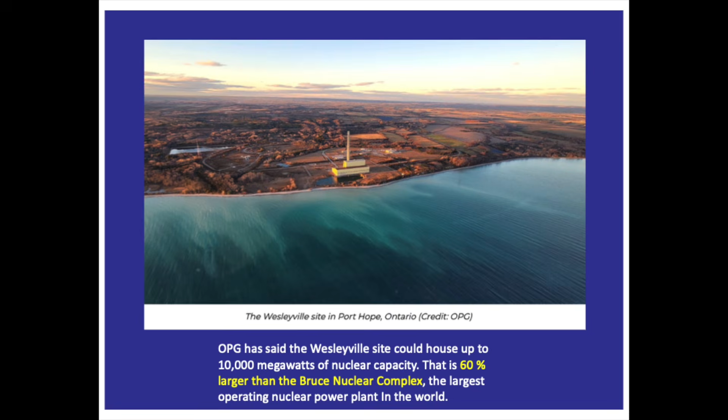What it's going to mean for the county in terms of traffic, in terms of noise, in terms of pollution, in terms of demand for services, and so on and so on. It really is a truly life-changing experience, and it depends upon what your priorities are. I'm sure that when a project like this comes in, there are people who can make a lot of money out of it. Other people can suffer the consequences. The question is, what are your values and how much are you prepared to stick up for them?

And they also have a requirement at Bruce for top security. And so they have a SWAT team, which has won U.S. national SWAT team competitions more than once because they're so tough. And they're allowed to use prohibited weapons, that is fully automatic machine gun type rifles that are forbidden to be used by the police or even by the RCMP. And that's because they are entitled to protect the plant with whatever force they deem necessary.

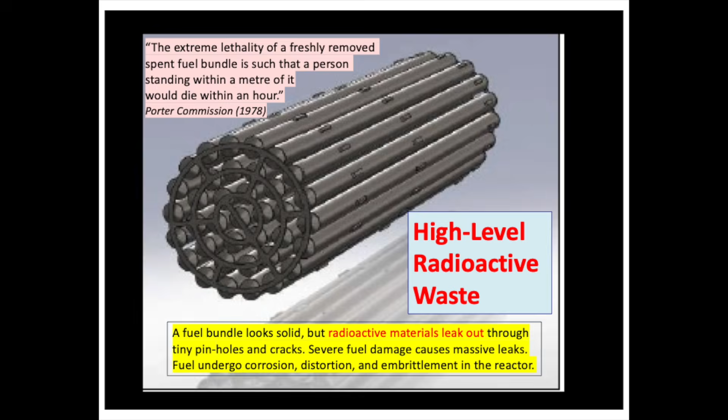You may not realize it, but that waste is going to be accumulating right here in your neighborhood because they're not going to take it anywhere soon. In fact, they have to store it for 10 years in a pool of circulating water. And all the time it's in that pool, the radioactivity is slowly dying down, but it's still extremely lethal for hundreds of years, even to approach.

The reason they have to have that pool of water there is because these wastes are so radioactive. They're millions of times more radioactive than uranium. You have here a uranium plant. These wastes are millions of times more radioactive than uranium. And the reason why is because the uranium atoms have been split. And when the uranium atoms are split, you create a whole multitude, hundreds of broken fragments, which are new atoms, smaller atoms, which are very unstable and consequently very radioactive.

And the radioactivity alone generates heat. And if you don't have water cooling the fuel, it's going to overheat spontaneously. And possibly when it's fresh fuel, freshly out of the reactor, it can even melt under its own heat. In fact, that's what causes meltdowns.

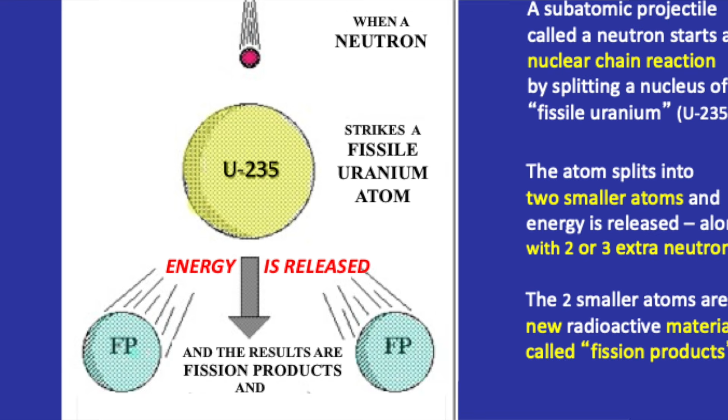Many people don't know that the Fukushima reactors that melted down in Japan, 3 of them, they didn't melt down because of the reactors operating. The reactors were shut down within minutes after the earthquake. But a day or so later, the fuel melted down because of its own generated heat from the radioactivity. It's the radioactivity itself that caused the meltdown. And that's what we're dealing with here.

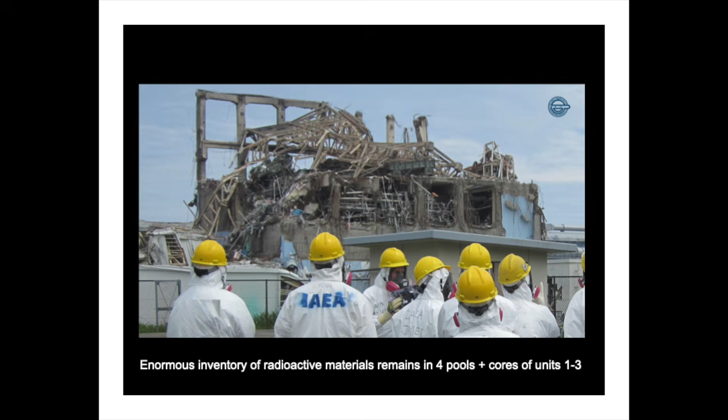Those radioactive wastes cannot be moved for 30 years after they come out of the reactor. Consequently, they're going to be accumulating here in Northumberland County, right on the shore of Lake Ontario. And there's going to be 30 years worth for every reactor that is operating. This is what happens when you take it out of the pool. You have to put it into what's called a dry storage container.

This particular one contains something like 384 fuel bundles. But the fuel bundles themselves inside weigh 10 tons, whereas the cask that contains them weighs 60 tons. So imagine a refrigerator, and imagine a case to ship the refrigerator where the case is 6 times heavier than the refrigerator. That's what these dry storage casks are like.

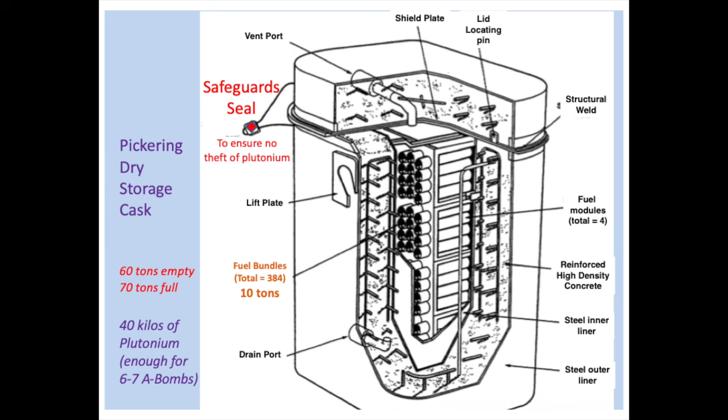And that's because they realize that these wastes are so incredibly dangerous that they have to protect workers and the public from inadvertent exposure to the wastes. When they do have a nuclear accident such as a meltdown, what it is is an accident that allows this stuff that is already there to be released. It's sitting there waiting to be released.

If it were attacked by a military operation, a bomb, for example, or if there was a severe earthquake, or as at Fukushima, where you had a tsunami followed by a complete loss of power to the plant, that's when these things go wrong, and that's when everything can be spewing out of the reactor and causing widespread contamination for a very long time. So that's what we call a nuclear accident.

And of course, they do everything in their power to prevent such an accident from happening. But the question is, how much is really in their power? We find out oftentimes that what they thought was in their power was not in their power at all. So nuclear waste has nowhere to go. Most of it will stay at Wesleyville for more than 100 years if this plant goes ahead.

And the reason for that is because they're hoping that these reactors would last for maybe 60 years before they were shut down. Now, that's never happened before. Reactors don't last that long, that's dreaming in Technicolor, right? But if they last for 60 years and then you still can't move the spent fuel until it's cooled off for another 30 years, you're already almost 100 years.

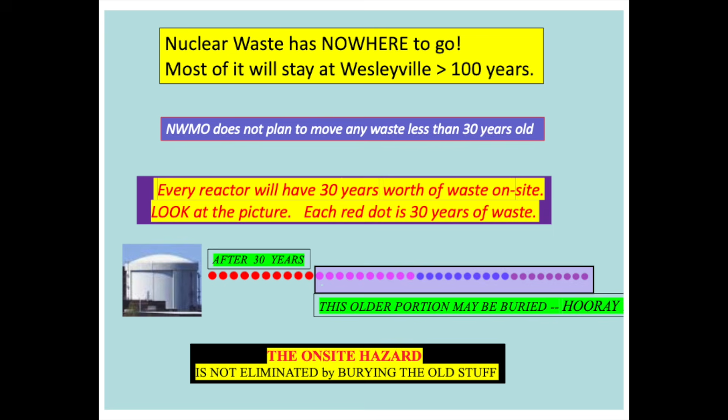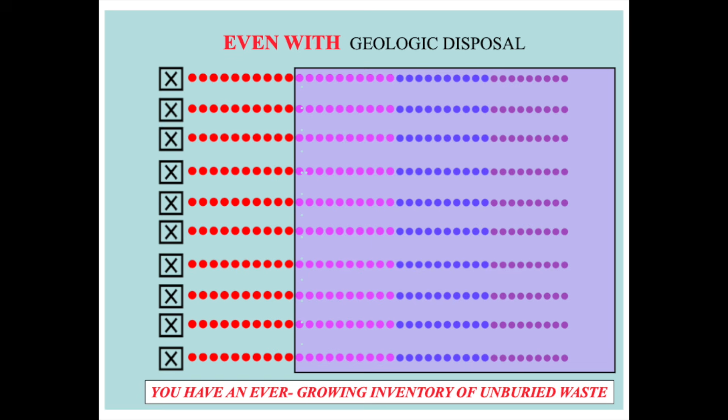So nuclear waste is an unsolved problem, and many people, both in and out of the industry, know this in their heart, but they say, well, what is the alternative? Well, one of the alternatives is to stop producing it, but that's not an alternative they like. And so they say, look, let us find a hole in the ground where we can put this stuff, and then that gives us a freedom and a license to keep on producing the waste indefinitely into the future. I say that's nonsense.

The only way you can possibly, and I'm not sure it is possible, get this safely off the Earth's surface is to shut the reactors down and move it all. Because if you keep on producing more waste at the top, you're never going to have a problem that is solved. It simply has the appearance of being solved, the illusion of being solved. It's the illusion of a solution. Just as we say dilution is not the solution to pollution, I could also say illusion is not the solution to pollution either.

Now, so big nuclear plans at Wesleyville. The question is, what on earth happened to the small modular reactors? Weren't they telling us for years now that small modular reactors are the way to go because the big reactors are obsolete? We're not going to build those things anymore. We're going to build the small ones. That's the smart way to do it. How come they're talking about such big reactors when, in fact, they are promoting small modular reactors? So let's take a look at the picture.

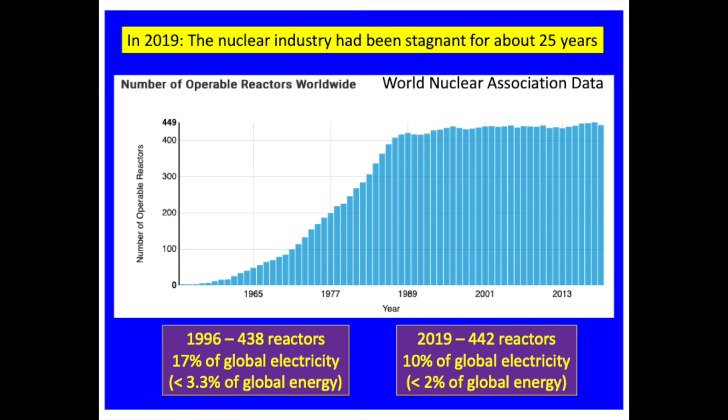So back around 2001, the nuclear industry already realized that they were in big trouble because they were losing market share. They were on a big decline. And so they had to do something. They had to rejuvenate the industry. And they decided to declare that there's going to be a nuclear renaissance. And the nuclear renaissance means we're going to build hundreds or maybe even thousands of large nuclear reactors all over the world. This was just simply the old idea of building large reactors on steroids, right?

And it turned out to be just a litany of failures because nothing worked for them. They only got a handful of orders, really a handful of orders, and they did not turn out well. Here, for example, there was a French giant called Areva, which was a salesman of nuclear reactors, and they went bankrupt. They collapsed. But they can't actually go bankrupt because they're owned by the government of France. And so they were absorbed by another government agency called Électricité de France. But Électricité de France did not take the 5 billion euros in debt which they carried with them, because that debt was more than their total assets.

Anyway, they planned a reactor in Finland called the Olkiluoto 3 reactor. It was a big one, 1,400 megawatts, and it began in 2005, long time ago, 2005. It was supposed to be operational in 3 years. That was the promise, at a cost of 3 billion euros. And everybody said, oh, good, now we're past the bad days. We're now going to build plants cheaply and on time and quickly.

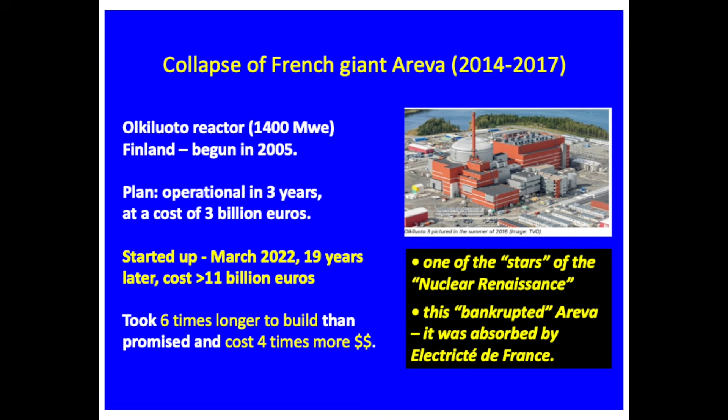Another example is the bankruptcy of Westinghouse in 2017. Westinghouse went bankrupt as a result of getting orders for 4 large nuclear reactors, which were called AP1000 reactors. They're about 1,000 megawatts each.

AP1000 reactors. By the way, AP1000 is going to be one of the contenders for the Wesleyville plants. When they get permission to go ahead with Wesleyville, and they hope they will, they're not specifying what they're going to build. They might build CANDU reactors, or they might build something else, and it could very well be AP1000 reactors. So these are the reactors which you might be building here at Wesleyville.

Now, it turns out that South Carolina ordered 2 of these reactors, and after spending $9 billion on the construction, they simply blew the whistle and said, we're not going to spend any more money on this. It's going nowhere. It's not going to work. And so it bankrupted Westinghouse, and it was a $9 billion loss. Westinghouse went bankrupt in 2017.

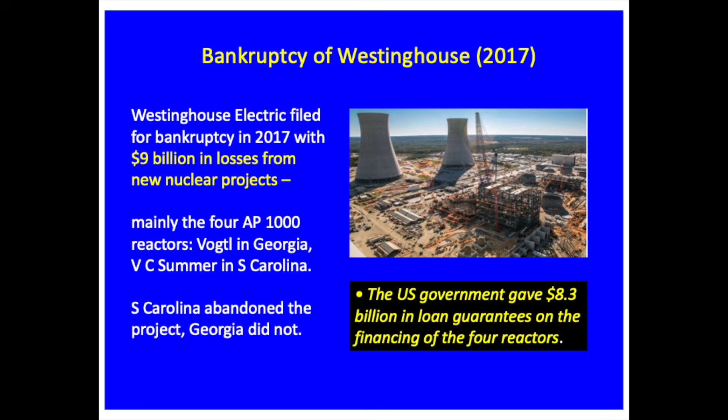The other 2, however, continued in Georgia. They're called the Vogtle reactors, 3 and 4, and they were built, and they're now operating. But the Vogtle construction license was given in 2012. Again, look at the time and the cost. The estimated cost was $14 billion. The actual cost was $35 to $36 billion. Amazing, eh? The estimated completion date was 2016 to 2017. The actual completion date was 2023, 2024, just a couple of years ago.

They're now running. Units 3 and 4 cost per kilowatt installed, if you divide the cost by the megawatts, you get $15,700 per kilowatt. That's the cost of this electricity. And everybody in the financial world is saying this is the most expensive electricity generating plant ever built anywhere in the entire world. That's what might be coming to Wesleyville.

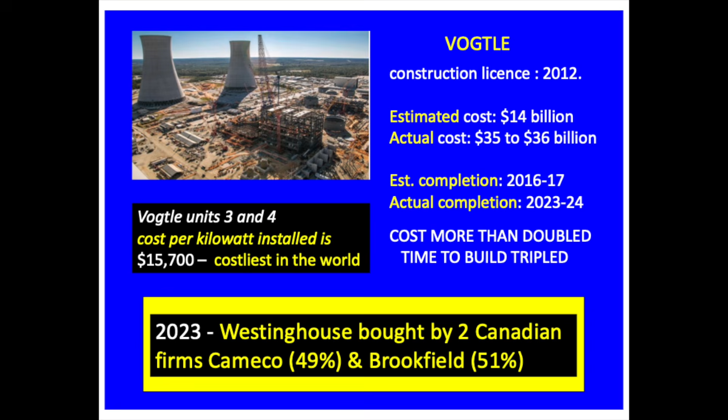So when people tell you that they know what they're doing and they've got this well in hand, don't believe it. What they do have is their back to the wall, because the nuclear industry has been going nowhere for 25 years, and they're desperately looking for more sales, for more activity. They want to get some action. Because the first nuclear renaissance was such a shambles, they've now declared a second nuclear renaissance, packaged as small modular reactors. Around 2018 is when that became current.

Another euphemism for SMR is second make-believe renaissance. Because despite the fact that they've been working on this and hyping it and talking about it for 8 years, there is not a single small modular reactor built and operating anywhere in the Western world. None. And the reason is they're either not working out because they're not well thought out, or they're unaffordable, or people just don't give it the go-ahead that it needs.

The problem with small modular nuclear reactors is they're very costly. When you scale things down, you lose what's called the economies of scale. The economy of building a bigger one is you don't have to use twice as much concrete, twice as much steel in order to build a power plant that's twice as powerful. But when you shrink it down, you go the opposite way. You end up spending a lot more money for a lot less benefit. So by nature, it's going to be much more costly to make smaller reactors. That's why they moved to the big ones in the first place. Now, how do they overcome that?

Well, the way they overcome that is by mass producing them. They figure if we mass produce them, we can get the cost down. Turn them out like refrigerators, or whatever. But you can't do that when you have 130 different competing models of small modular reactors at the present time. They're all different. How can you mass produce something when you're only doing 1 or 2? You need orders for hundreds before you can justify setting up a factory to mass produce anything. So the very number of competitors makes it unprofitable.

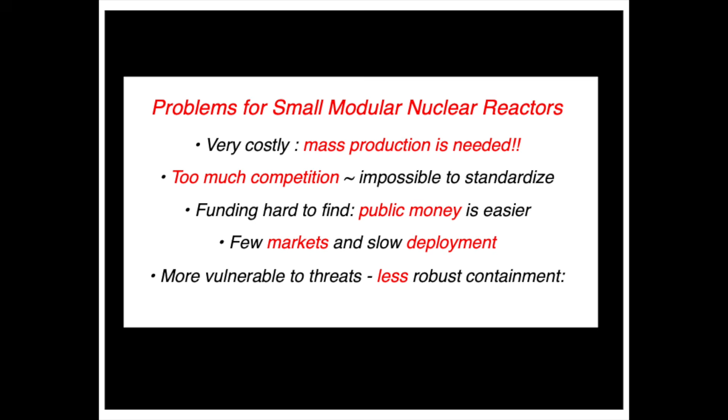The idea, of course, is that if they put enough public money in, then private capital will come along. But even now, they're saying that private capital will not invest unless they get loan guarantees. That means the government is on the hook. So if the investment goes sour, they don't lose money. The government has guaranteed the loan. So it's still public money, even though it's via private capital. So this is a real problem. And the other thing that's very difficult is there are few markets and slow deployment, and they're more vulnerable to external threats because they have less robust containment.

I've put a few other things here, very simple. They're not so small. They're not so modular. They're not so affordable. They are, however, nuclear. And so those are all downsides. They're not anything they claim to be, and they are what they claim not to be.

Here's an example. In Idaho, they wanted to build some small modular reactors, a company called NuScale. It was a scaled-down pressurized water reactor, only 77 megawatts. Now, that is small, 77 megawatts. And what they wanted to do is build a battery of them. They wanted to build several of them. Rather than building one big plant, they built a bunch of small ones side by side.

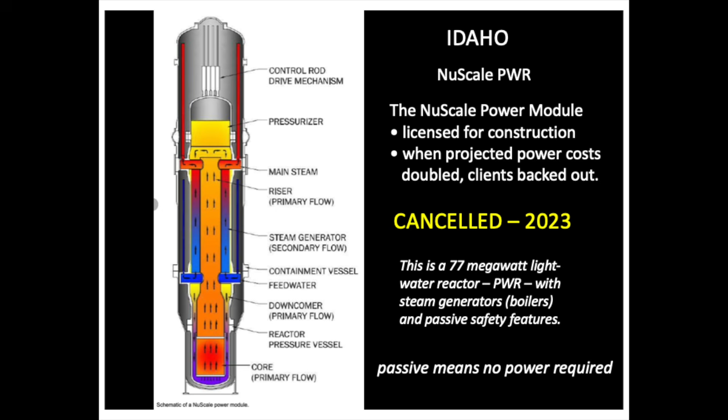And, well, it was canceled in 2023. Now, that was after a couple of decades of dithering around with this. Why? Because the projected cost of the power more than doubled, 2.5 times. And so the investors who were from Utah backed out and said, we're not there anymore. So this project was canceled. It joined the scrap heap of other projects.

Chalk River, Ontario, they wanted to build an even smaller reactor, only 5 megawatts. Now, 5 megawatts is really, really small. A 5-megawatt reactor called the Ultra-Safe Micro-Modular Reactor. Doesn't that sound like a great name? And it was going to be a gas-cooled reactor that was going to have molten salt heat storage. It was not going to generate 5 megawatts of electricity, but only 5 megawatts of heat. Now, 5 megawatts of heat would only produce about 1 or 2 megawatts of electricity maximum, so it's really small.

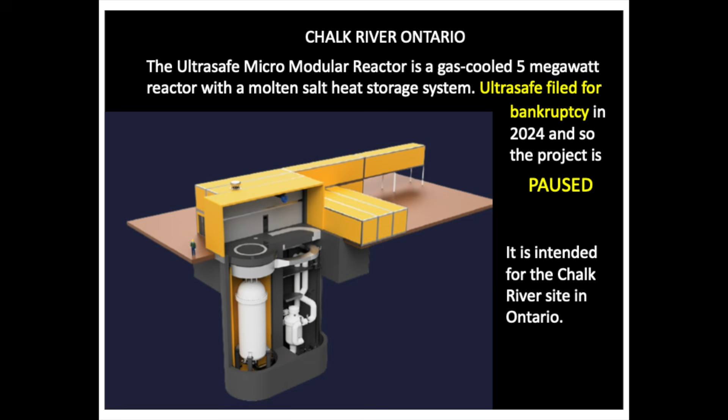Well, Ultra-Safe Corporation went bankrupt. They filed for bankruptcy in 2024, and so the project is not canceled but paused. They might pick it up again if somebody brings Ultra-Safe Corporation out of bankruptcy or buys the assets otherwise.

Here's another thing that we've all heard about, and that's just next door in Darlington. The BWRX-300, it's a boiling water reactor, 300 megawatts. That's about half the size of the Point Lepreau reactor in New Brunswick, or a third the size of an existing CANDU at Darlington. It's estimated to cost $6.5 billion Canadian, equal to the cost per megawatt of the Vogtle plants in Georgia that I just told you about a little while ago. It's under construction. The Canadian regulator has given a construction license for the first of 4 units to be built east of Toronto at Darlington.

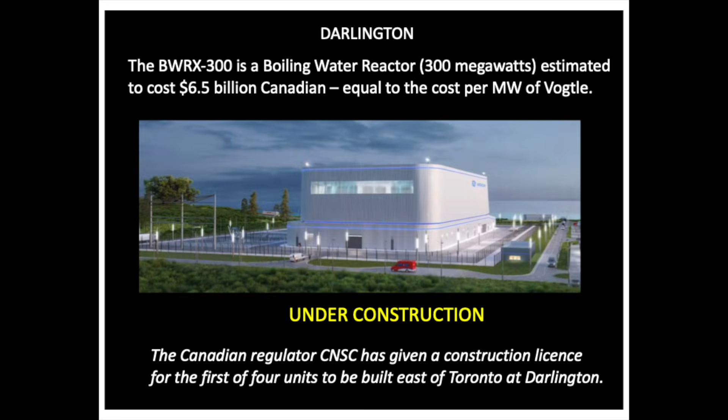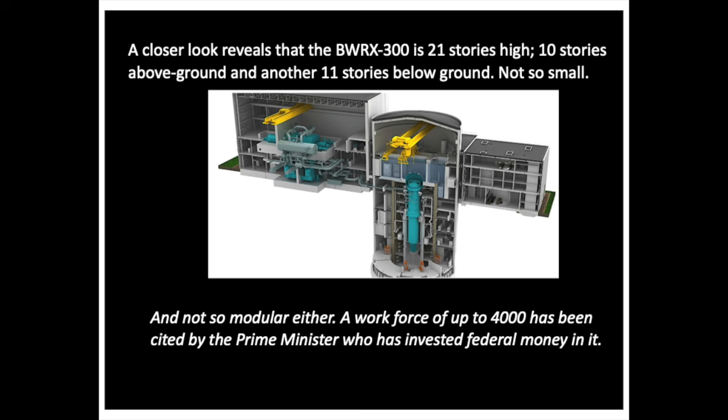Now, a closer look reveals that the BWRX-300 is 21 stories high. So when people tell you these are small modular reactors, don't believe it. 21 stories high. That's 10 stories above ground and 11 stories below ground, because a lot of it is underground. So it's not so small and not so modular either. A workforce of up to 4,000 people has been cited by the Prime Minister, who has invested federal money in this project to the tune of about $2 billion. Our money, our tax money.

Here's an overhead picture provided to me by Ralph just yesterday of the construction site that's going on right now. Now take a look at that picture. Those little pieces of rice on the side of the road, those are cars and trucks. This is the site of a construction of a small modular reactor. Do you see that big hole in the ground and you see that crane? That is the largest crane in the entire world. And it was used to lift the concrete platform to put it down at the bottom of that hole as the foundation of this Darlington BWRX-300 reactor.

So it's an incredible thing when you look at the scene and you ask yourself, this represents only 3% of what is proposed for Wesleyville. Look at that construction site and think of that as 3% of what you're in store for.

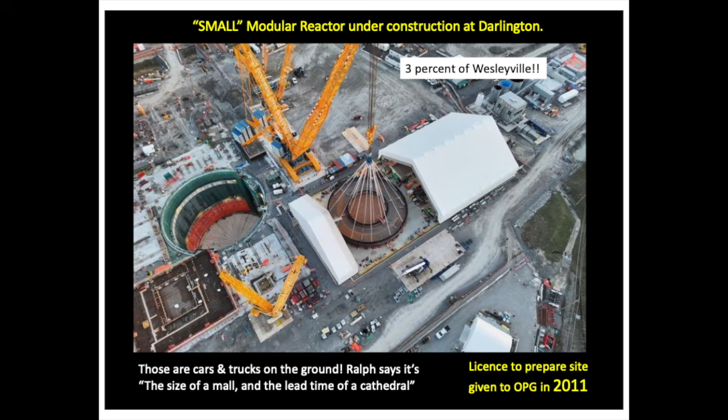And now, what's even more alarming is the cost per kilowatt, if you work it out by just dividing the numbers, right? 6.5 billion divided by 300, it comes out to 21,666 Canadian dollars per kilowatt, which translates to about 15,500 US dollars. Well, you know what? That's very close to the Vogtle cost, which is 15,700.

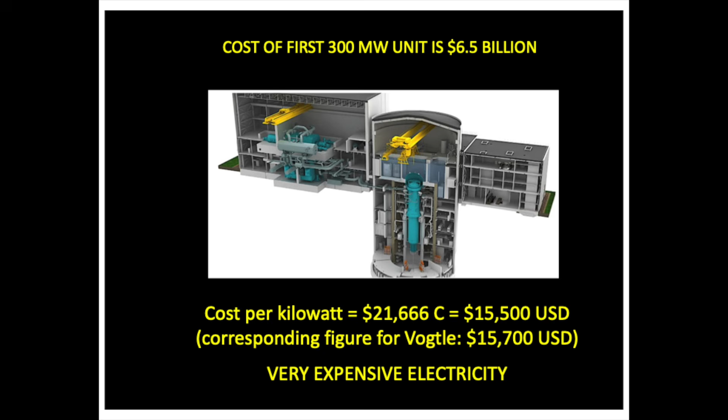So this has to be counted, the Darlington plant, BWRX-300, as among the most expensive electricity plants ever built in the world. By the way, one of the things that particularly upsets me, and I intervened 3 times on this particular dossier before the Canadian Nuclear Safety Commission: they simplified the size of it somewhat, it is smaller than what they had in 2011. And the way they simplified the size was by eliminating several safety systems, including the emergency core cooling system, the emergency pressure relief valves in the primary coolant system, and several other safety systems were simply eliminated in order to keep the cost from going absolutely through the stratosphere.

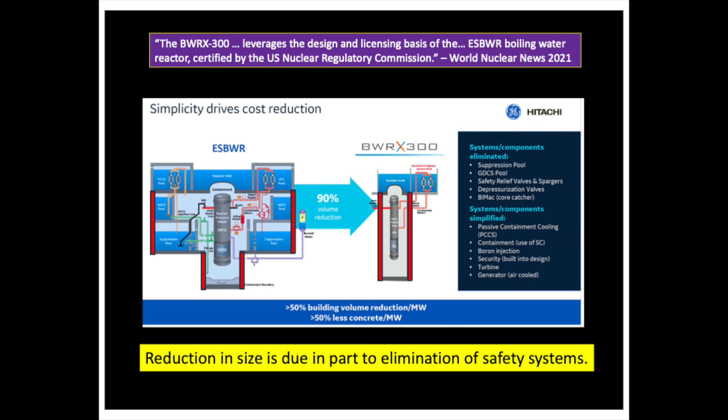So now here's the situation, ladies and gentlemen: although there's all this talk about small modular reactors, that's not what they're building at all. If you look at the new nuclear plans in Canada, they are talking about 4 large nuclear reactors in the Peace River area of northern Alberta, 4,800 megawatts. At Bruce C, they want to build 4 more reactors at Bruce, you've heard. Those are large ones too. Another 4,800 megawatts. Here at Wesleyville, they want to build large reactors, 10,000 megawatts. That adds up to 19,600 megawatts. That's almost 20,000 megawatts of large reactors.

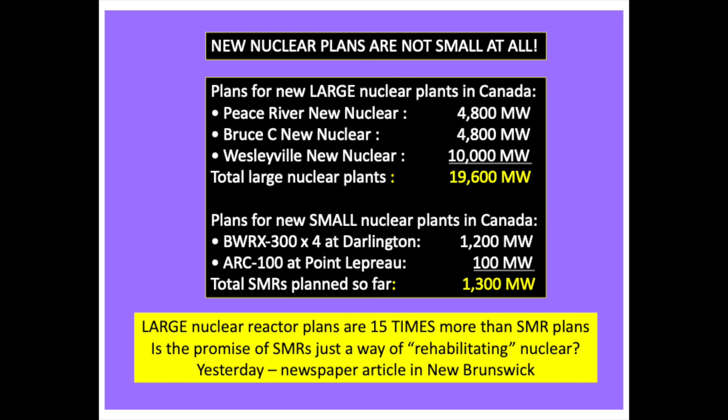What about the small reactors? Well, at Darlington, they're proposing 4 300-megawatt reactors. That's 1,200 megawatts. One at Point Lepreau called the ARC 100. That's another 100 megawatts. That comes to 1,300 megawatts. Obviously, Canada is not building small modular reactors right now. They want to build large nuclear reactors. And the reason why is because the light is beginning to dawn that the small reactors are prohibitively expensive. And in fact, the large ones are prohibitively expensive as well. So one begins to wonder that maybe all this talk about small modular reactors was just to get people used to the idea of nuclear being good so that they could then build large ones again. So they're going back and wanting to build the old-fashioned ones that small ones are supposed to supplant.

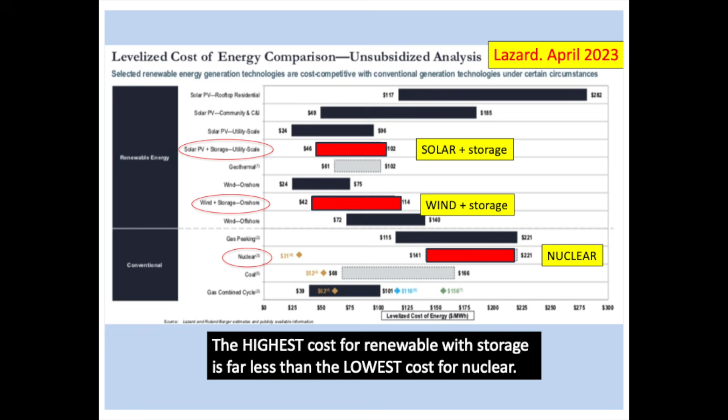So why would anybody be buying the most expensive thing on the shelf? Especially when it's the slowest thing on the shelf. Because nuclear takes a lot longer to deploy than either wind or solar. So if you're really talking about a crisis or an emergency, like we've got to do something about climate change, shouldn't you invest in the cheapest, fastest things first and not in the slowest, most expensive things? That's what we are being told is common sense. And that is not common sense, ladies and gentlemen.

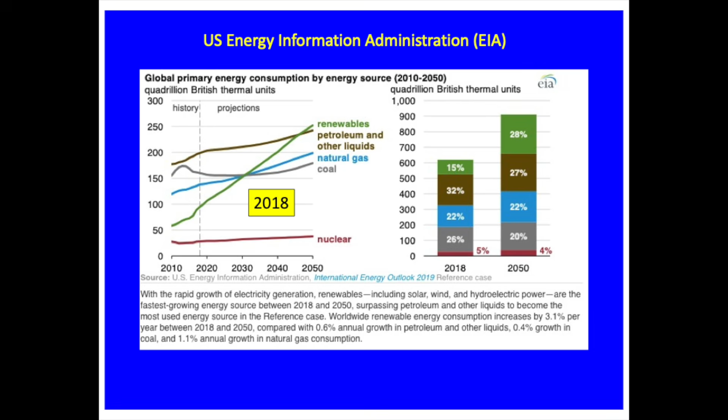Now, even if we go back to that same period of time I was just talking about, 2018, 2019, even then the U.S. Energy Information Administration was projecting the future to look very rosy for renewables. You see that sharp green line on the left there? That sharp green line that slopes upwards, that's renewable energy. And the bottom line is the red line, that's nuclear. The thing is, renewables have been beating the pants off nuclear around the world. Last year alone, 92.5% of all new electricity production in the world was renewable. And yet we're wanting to build nuclear.

At COP28, the climate change conference, back in 2023, there was an official commitment by over 200 member nations to triple renewable energy and double energy efficiency by 2030, which is just around the corner, as you know, only 4 years from now. But this was considered feasible because of the rapid growth that's already been taking place. It's not beyond question that that can be done. It will take work, it'll take effort, it'll take investment, but it can be done. We can triple renewables and we can double energy efficiency.

Meanwhile, a smaller group of 25 nations, without any consensus from the COP28 conference, projected privately that they would like to triple nuclear energy by 2050. Notice that's 20 years later. So we're going to achieve similar benefits by 2050 that the renewables are going to achieve by 2030. Again, it just dramatizes the situation.

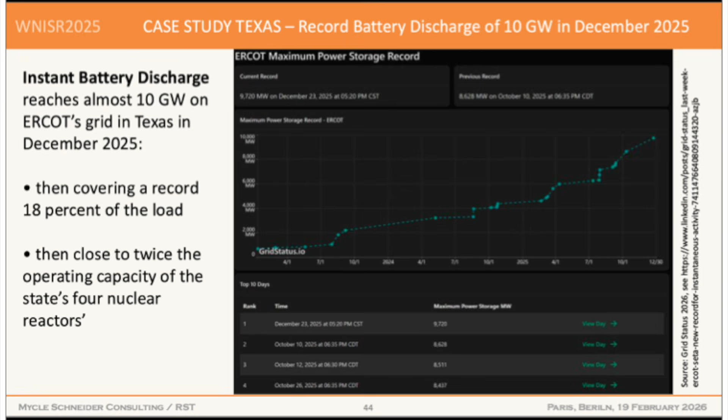Now here's a graph that is very hard to read. It's kind of a little skippy blue line there, but what it's about is the remarkable increase in capacity of battery storage. These large utility companies, like in Texas, they have ERCOT, and ERCOT has invested a lot in solar energy. Many people don't know that the biggest investor in North America in solar energy is in Texas. And because solar is intermittent, because the sun is not always shining, you need to have battery storage. They have battery storage now.

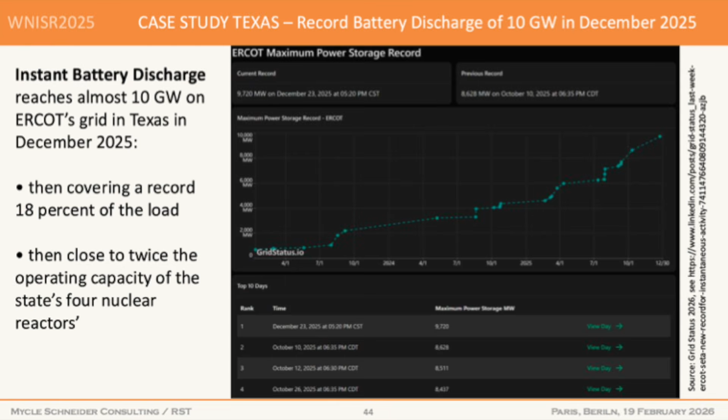In December of 2025, they drew out of the batteries 10,000 megawatts of electricity. The same amount that is supposed to be built here at Wesleyville, not from nuclear reactors, from batteries. So people do not realize that the technology of batteries, like the technology of renewable energy, has been increasing dramatically, and the cost continues to go down for both renewable energy and even faster for battery storage. So that's the writing on the wall, ladies and gentlemen, in terms of what the future holds.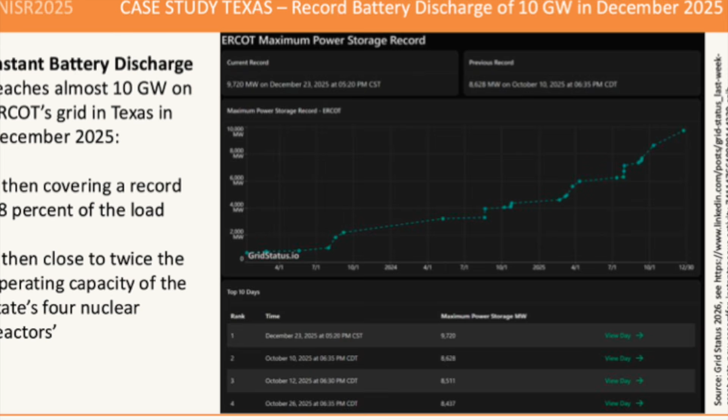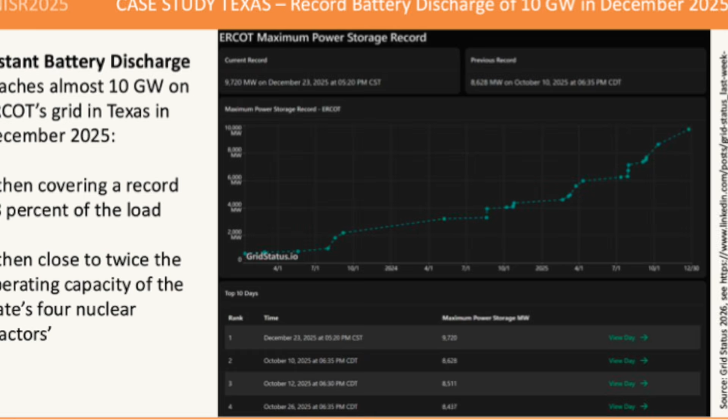It's obvious to everybody, of course, that if we were able to meet all of our needs with renewable energy, we wouldn't have to worry about things like the Strait of Hormuz, because we wouldn't need the oil that those tankers are carrying. We would be running our societies on renewable energy, and it would be a much more peaceful world, because these non-renewable resources are the source of great international tension and great international conflict. Look at the bombing of Iran, unprovoked, by the United States and by Israel, over what? Over something that they don't seem to really have any control over.

So it's an indication that some of the advantages of renewables and a renewable path are economic. Some of them are environmental, but some of them are simply social and political. They're politically and socially much more benign technologies than the ones that we're promoting.

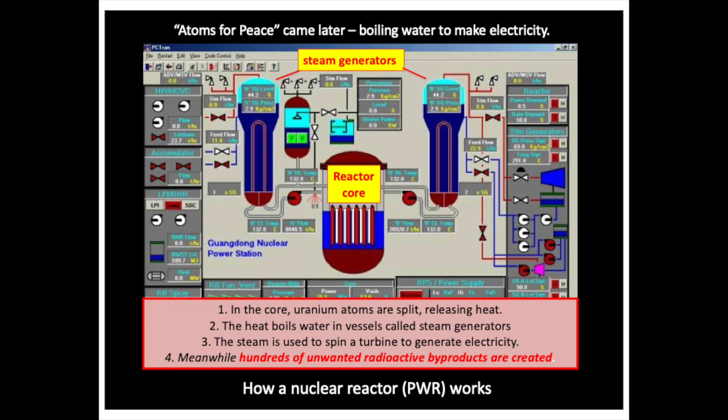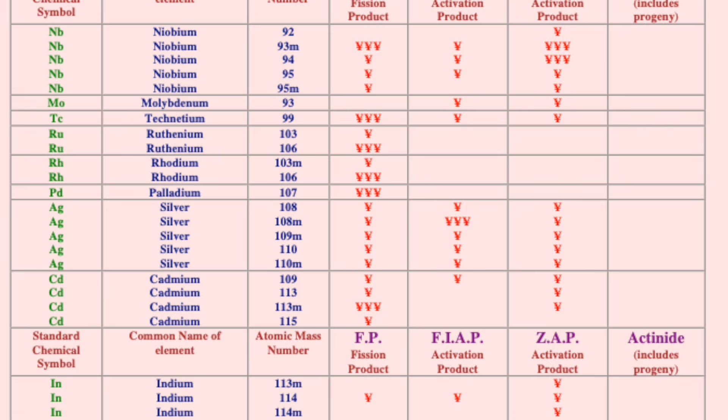And that's true with a nuclear plant or with any other type of oil-fired plant or coal-fired plant. It's the same thing. The only difference is how you get the steam. Now, in a nuclear plant, you get the steam by splitting uranium atoms. The problem with splitting uranium atoms is you create hundreds of new radioactive materials which were never found in nature before 1940. They're brand new entries into the evolutionary race on Earth.

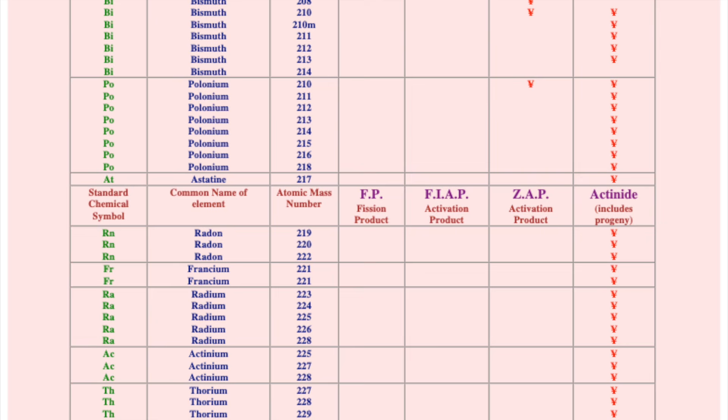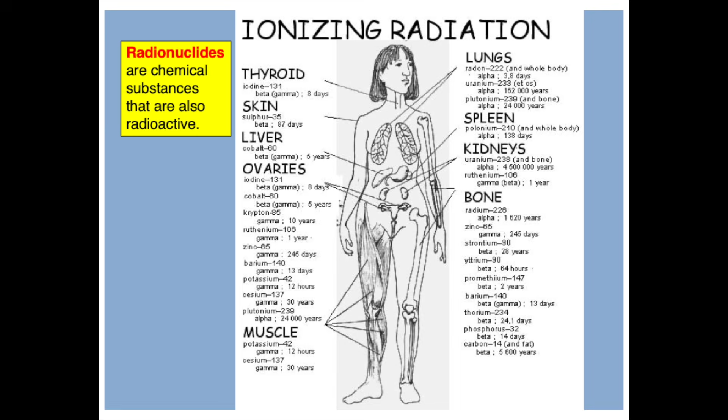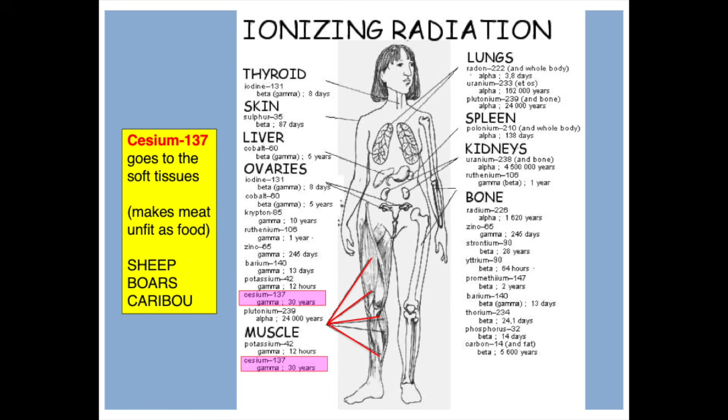And our bodies and the animals around us, all of our relations as indigenous people like to say, we have no evolutionary ability to cope with these materials because our body has not had the need to do that before. So consequently, they're extremely dangerous. When they get into the body, they cause damage to living cells. And that damage can lead, in some cases, to cancers, in other cases, to genetic damage. In pretty well all cases, it leads to a suppression of the immune system and many other various illnesses, including strokes and heart attacks.

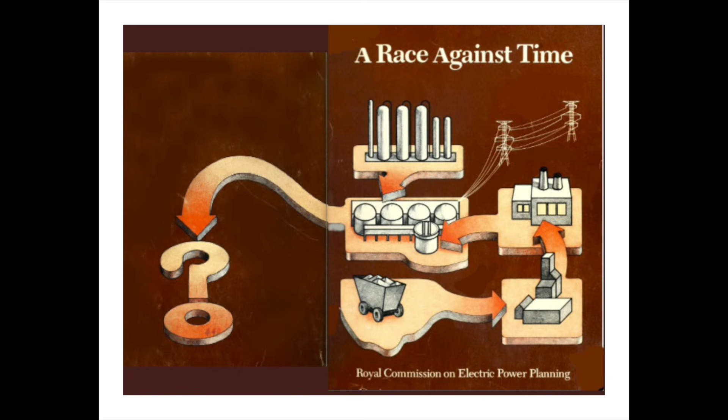So the idea of the nuclear industry is simply to keep these things isolated from the environment by putting them in a place where nature can't get at it. And that's the whole idea behind deep geological repositories. Many people think that it is far from proven to be safe, because we've already had experiences with 3 geological repositories which have leaked radioactive materials out of them, 2 in Germany, 1 in Carlsbad, New Mexico.

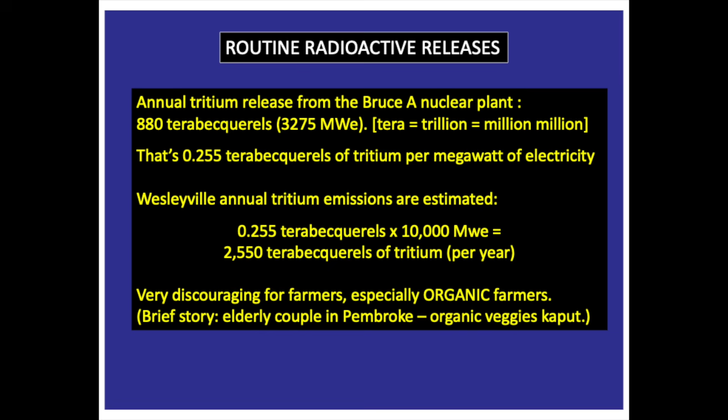And again, contrary to assurances you're given by OPG, these plants do routinely give off into the air and into the water large amounts of radioactive materials, which are radioactive hydrogen, radioactive carbon, carbon-14, and smaller amounts of radioactive iodine routinely given off into the air and the water, and a smattering of dozens of other radioactive materials which come out as what are called particulates.

I have done a calculation, and actually I showed you this calculation, it was on my slides as well. Last time I was here, I showed you a calculation that shows that the amount of tritium given off every year by the Wesleyville plant, if you were to put all that tritium into the water and contaminate it to the maximum permissible amount that is allowed by law, the amount of water that would be contaminated every year would be the same as the water that's consumed by the city of Toronto every year. So don't let anybody tell you this is a small amount of radioactivity.

What's more, that's based on the existing Canadian standard for tritium in water. It's called tritium, radioactive hydrogen. That's based on the current standard of 7,000 becquerels per liter. A becquerel is 1 atomic disintegration per second. If you had 7,000 becquerels in a liter of water and you drank that liter of water, then you'd have 7,000 disintegrations per second going on inside your body. That's called an internal emitter.

And there's no way that you can filter radioactive water from non-radioactive water. They behave exactly the same way. So there's no municipal drinking water purification system that can remove the tritium from the drinking water, nor from the irrigation water that farmers might be using for their crops and so on.